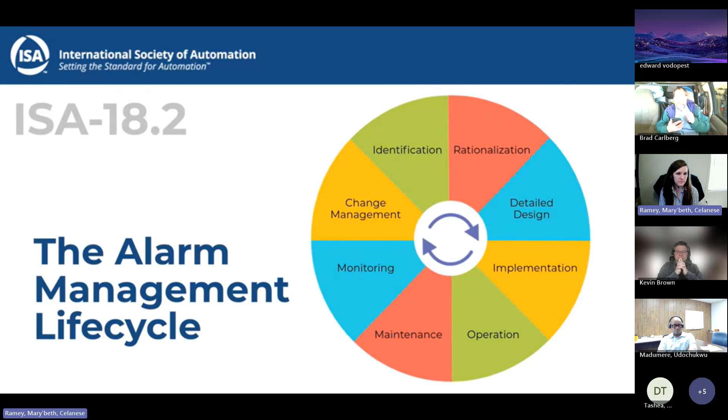In today's fast-paced process industries, every second counts, and missed alarms can lead to safety incidents, production losses, and regulatory fines. Introducing ISA 18.2, a game-changer in alarm management. This standard isn't just a guideline, it's your blueprint for transforming chaos into clarity. Imagine an environment where every alarm is meaningful, guiding your team to swift, decisive actions. With ISA 18.2, this is a reality. At the heart of this standard lies a comprehensive lifecycle approach, ensuring your alarm systems are efficient and evolve with your operational needs.

Developing a tailored alarm philosophy sets the foundation for consistency and excellence, aligning every alarm with your organization's unique objectives. Prioritization and rationalization are key. By focusing on what's truly critical, your team can act faster, reducing downtime and enhancing safety. A well-designed human-machine interface ensures alarms are presented clearly, empowering operators to swiftly make informed decisions. Regular performance monitoring transforms data into actionable insights, driving continuous improvement and operational excellence.

And investing in training and robust documentation ensures your team is always prepared, confident, and aligned with best practices. Don't let alarm overload hold your operations back. Embrace ISA 18.2 and unlock a new era of safety, efficiency, and profitability. Learn more at isa.org/ISA18.2.

Okay, so here's the suite of documents that this committee maintains. So we've got two standards actually, 18.1 and 18.2. So that one was really geared at 18.2, which is the main one, but we do still have 18.1. So 18.1 came first, and I'll give a little bit of history in the next slide, but 18.1 is about annunciator sequences and specifications. So this was the first technology to the market before you had Windows-based alarm systems, computer-based alarm systems, when you still had panels.

And there's still a market for that. And so we're keeping that standard up to date and modernized, and just considering what are the minimal essential requirements for maintaining those systems. But then the one that's got a lot more activity going on is 18.2. That's the management of alarm systems for the process industries, more of what you would think about computer-based alarm systems, but annunciator panels are still included in that scope as well.

All of our technical reports over to the right fall under the 18.2 standard. So they don't roll up to 18.1, they roll up to 18.2. And these technical reports provide a lot more guidance than the standards do. Standards just say the minimal essential requirements in order to conform to that standard. Technical reports give a lot more helpful information and recommendations about how to do so. And I'll talk about each one of those in more detail in a bit.

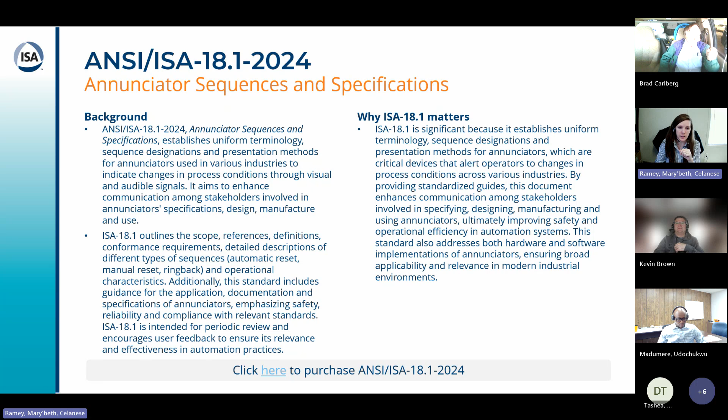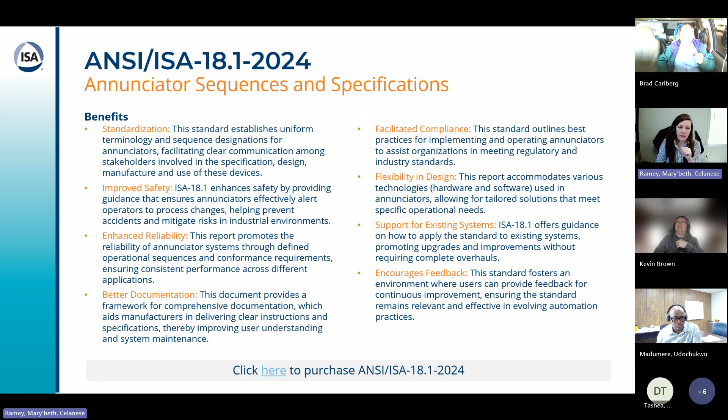Some of the benefits: standardized terminology, standardized sequences. It's going to lead to improved safety, reliability, documentation, compliance, flexibility, support for existing systems, and then any feedback. So that's common across any standard that you're going to come across. So 18.1 talks more about that. And I hate to just read off slides, but like I said at the beginning, with the new IP policy, this is all information that's available on ISA's website. So I had to copy and paste it here, and I've got to stick to this instead of getting more into the weeds.

Okay. 18.2 is really where all the activity is going on today. This talks about managing alarm systems in the process industries, the workflows involved, the technologies involved, specific to the process industries. It could be continuous, it could be batch, it could be discrete. They're all in the scope. And, as was shown in that advertisement video, there's a life cycle approach that's proposed. And in that life cycle, it talks about the minimal essential tasks and technologies in order to have a good performing, reliable alarm system.

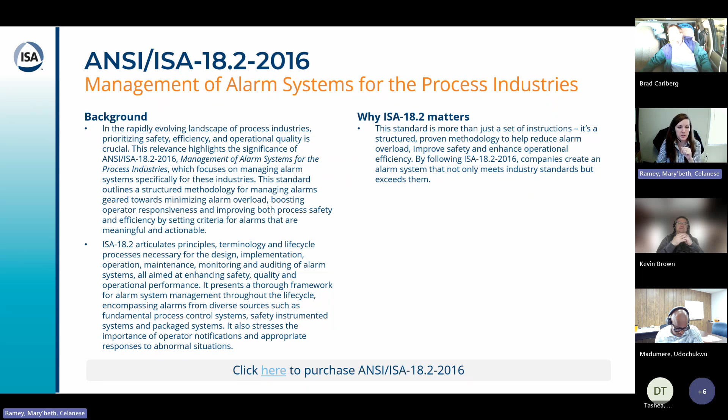So some of the benefits are the same. You're going to have better safety if you follow the practices outlined in 18.2. You're going to be more organized following the life cycle approach. You'll have your alarm philosophy that's discussed in 18.2. It's your central idea document of how you're going to operate and maintain your alarm system.

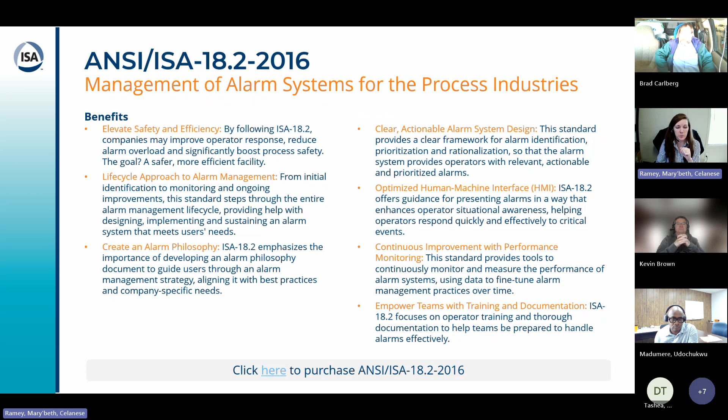It'll help drive more clear alarm designs, more consistent alarm designs. Same with your human-machine interfaces, more consistency there and more optimization there. And then there's also the continuous improvement and monitoring lifecycle stage to ensure that it's not just a one and done effort, it's continuously maintained. And then there's going to be a team-based approach. And so you talk about roles and responsibilities that would be appropriate to have a part in this.

Then you get into each one of our technical reports. So the alarm philosophy gives more detail about if you're going down the path of writing one for your company or your specific unit, you'd want to consider looking at this technical report for some really good ideas about what to include. Things like setting your alarm priorities, how that's going to be calculated based on what the consequences are at your site and your process, and the time to respond.

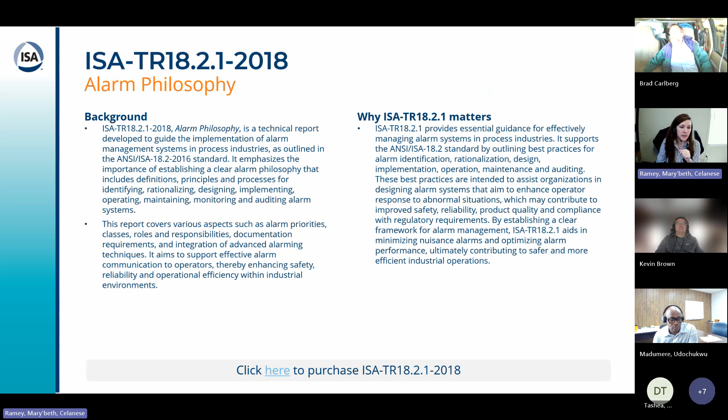It gives guidance there, gives guidance about roles and responsibilities, like I talked about earlier, how to document everything and maintain that, and what advanced techniques you're going to be using. That's just a little sample of what's included in the philosophy. It also talks about how you're going to identify and rationalize alarms. So having that laid out in front of you to make sure it's clear.

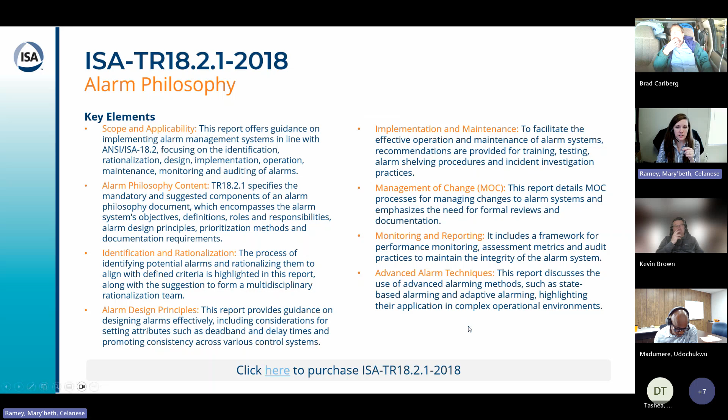And then how you're going to manage the change anytime you go to change an alarm or even a whole alarm system. What are the expectations around authorization and documentation? Monitoring and reporting. How are you going to ensure that your alarm system is performing well? And how frequently you're going to look at it. And then, like I talked about, any advanced alarm techniques that you use should be documented.

Our technical report two gets more into the alarm identification and rationalization lifecycle stage. And so this is a big effort. And if anyone here has already gone through alarm rationalization at your company, it's a large effort. And so it lists some good ideas.

Sorry if you can hear the background here. I'm at my plant today.

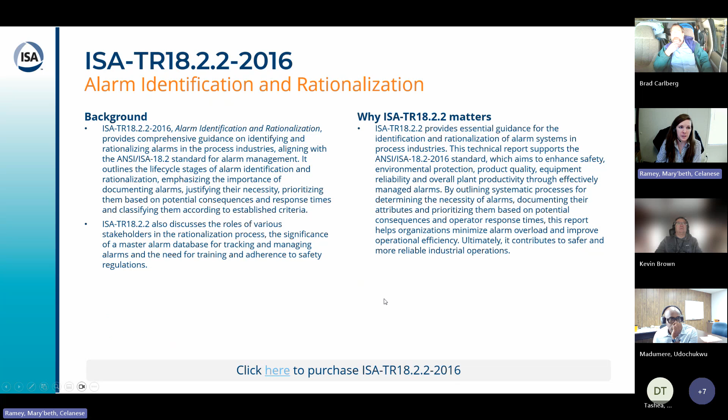But it gives some good ideas about how to facilitate alarm rationalization and how to document all of that. So what's included in that, it talks about a master alarm database that houses all your rationalized and authorized alarm parameters and attributes, and then the prioritization methods.

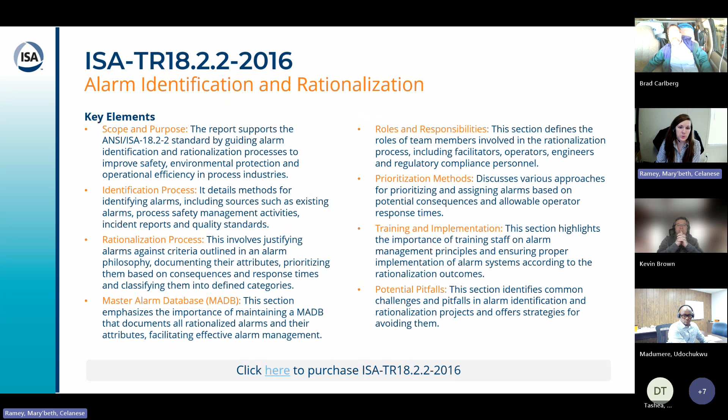So when you're in alarm rationalization, that's what you're doing. You're assigning priorities to alarms based on the potential consequence of no action, and how long it will take the operator to perform the actions. And then how are you going to implement those changes and train operators on them?

Then you start getting into alarm design. TR3 talks about the basics of alarm design, setting things like alarm set points and guidance for some good set point estimations and calculations, setting deadbands and on delays or off delays. These are some basic methods when you go to actually design your alarms.

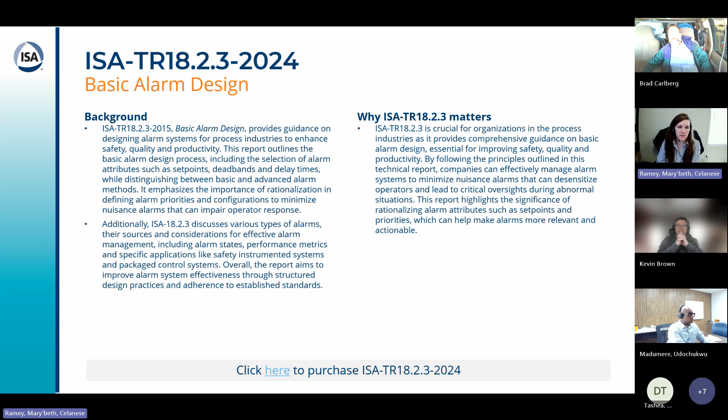So TR3 talks about, if you do the basics, it's going to get you the majority of the way there in terms of having a good alarm system. And here's more of what's included. Like I said, this is all on the website. But then once you get into TR4, you start talking about enhanced and advanced alarm methods.

So if your basic alarm methods haven't gotten you all the way there, and you're still having some flooding issues with your alarm system or nuisance alarms that are bothering the operators, that's when you might want to start looking at TR4's recommendations on maybe you need some enhanced and advanced alarm methods. So advanced alarm methods, things like mode-based alarming. If your plant is in shutdown mode, can you automatically disable a subsection of alarms because they're not relevant? Things like that are advanced.

Enhanced would be, can you give your operator more dynamic information about the cause of an alarm? Instead of listing all the possible causes and they have to determine which one it is, can you more readily give them more information about what's actually the cause at that time? So that talks about more of those enhanced and advanced alarm methods in TR4.

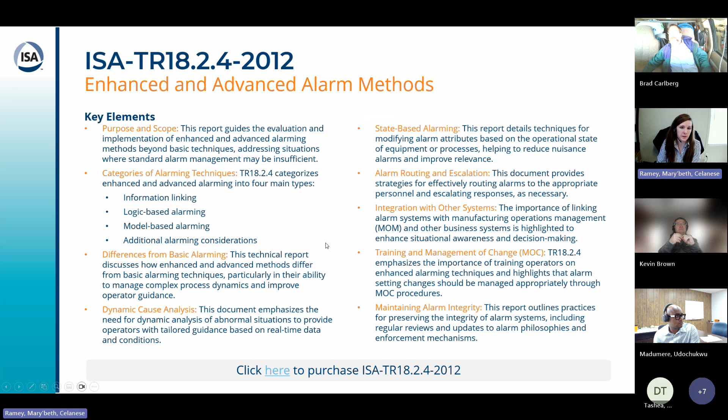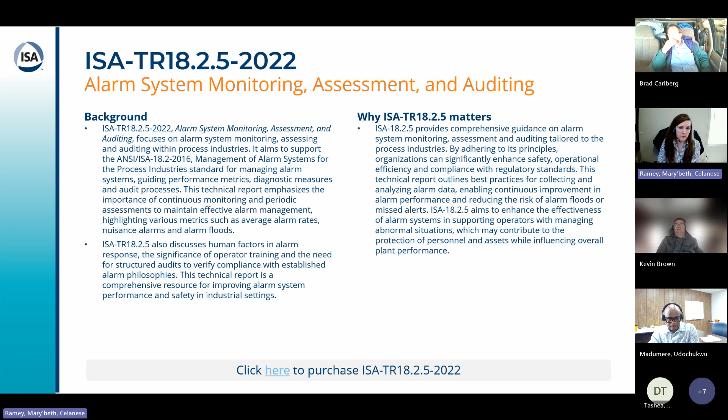TR5, the life cycle stage of monitoring, assessment, and auditing. You capture all of those life cycle stages in this one TR right now. It talks about what metrics would be good to implement to make sure your alarm system is performing reliably, and what are the best to look at to start with in order to make the biggest impact and the biggest changes. And then auditing, who needs to be involved and what are you auditing against? Well, your alarm philosophy and guidance like that. So here's more of what's included.

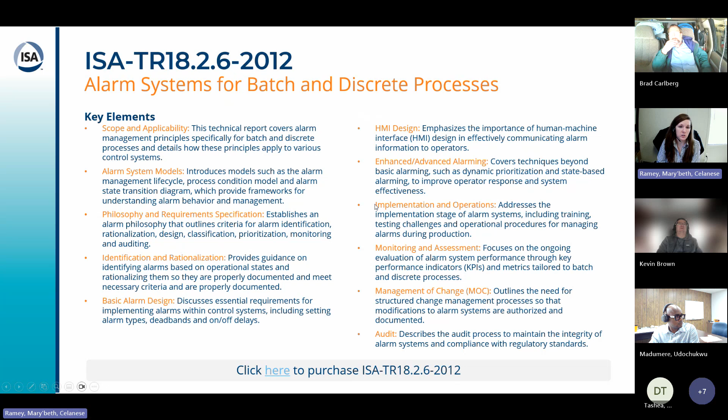TR6 discusses pretty much every single life cycle stage, but with the scope of batch and discrete processes. So it was recognized that a lot of the content is geared toward continuous processes, but batch and discrete processes do fall under the scope of 18.2. But maybe if you're interested in them specifically, you could just start at this TR and it goes through every single life cycle stage and considers, well, for batch and discrete, here's how you want to consider it. So for example, alarm system models specific to batch might be relative time versus absolute time, relative to batch step, things like that. This TR goes into detail about considerations on every single life cycle stage for batch and discrete.

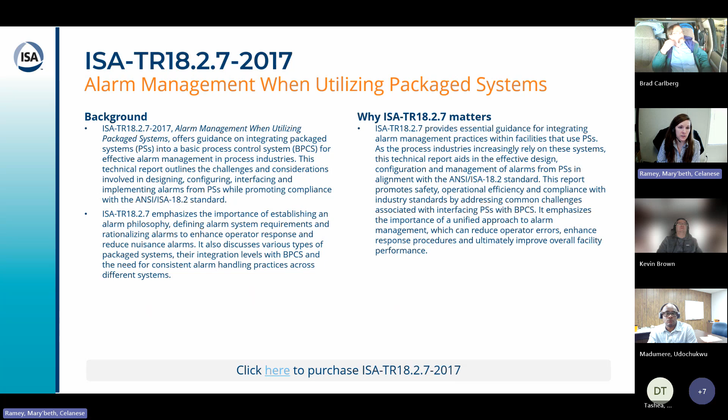And then the same with package systems. It's pretty much the same as the batch and discrete TR. It considers every single life cycle stage, but from the lens of package systems and what considerations to keep in mind for those. Communication interfaces, if you're going to link it to a common supervisory system, best practices to do that for alarms and things like that.

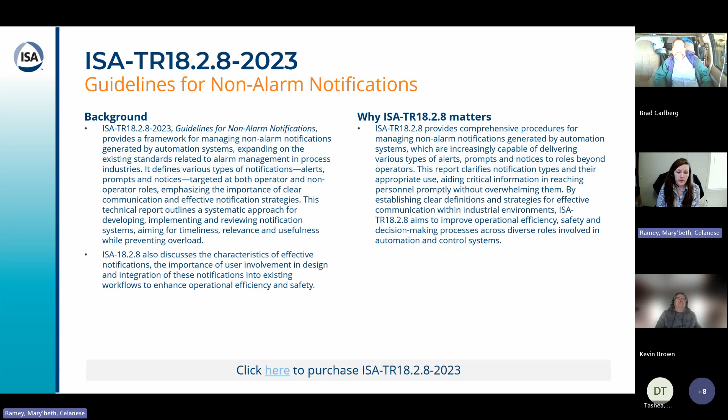And then finally, our last published TR, guidelines for non-alarm notifications. So you all probably know there are a lot of alarms configured that maybe aren't necessarily for the operator, but that's the person that they come to because it's through the automation system, the control system. So this technical report gives guidance on, can you better direct it toward a non-operator role if the actual action to be performed is not for the operator. So it gives different definitions for types of notifications that aren't necessarily for the operator, or they aren't necessarily considered alarms. Maybe they're urgent notifications requiring a timely response, but they're not abnormal, for example. So it goes more into those definitions and guidance for each type of notification.

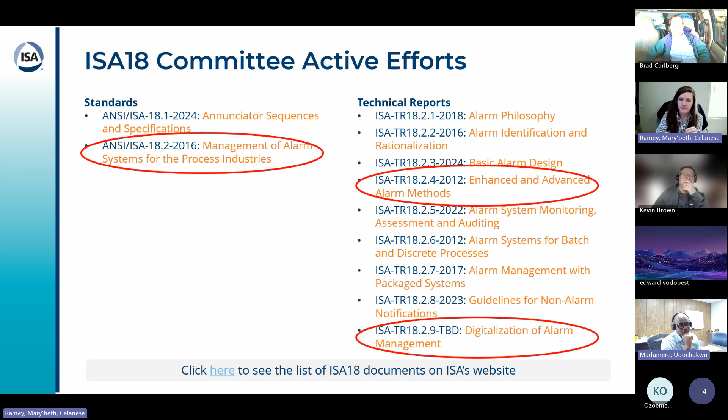So I think they're just two different things at this point, because there are some places you can't use DCS. For our systems, we don't use DCS. Of course, the PLCs communicate with each other, but it's just produce and consume tags to let the next process know that the process has finished so it can take over, right? So that's how we communicate between PLCs, but they don't run the same process. I know DCS systems like DeltaV have multiple IOs scattered all over, more like a distributed PLC network. That's how I understand it.

So I think we're getting hung up on terms and how we implement. When we look at functionality, some of the newer PLCs available today, like Siemens, you can add an HMI on top of it, and it can appear to the unknowing person that it's a DCS, when in fact it isn't. It's a PLC. It has IO cards, digital cards in it, and it displays HMI.

Most SCADA systems attach via some type of communication link, not a direct link, to PLCs. So we're getting hung up on specific terms, and sometimes we default to DCS. I think it just became a common term that's been around for probably the first 10 years of industry where the HMI existed. But really, it's computer control systems now, automation.

If you look in our documents, as Mary Beth said, we don't say DCS anymore. That's probably a mistake on our part saying DCS, because we do consider all computer control systems, even SISs. So we talk about alarms from safety instrumented systems. That's all within scope. Any industrial control system, ICS maybe is the standard term, within the process industries falls within scope.